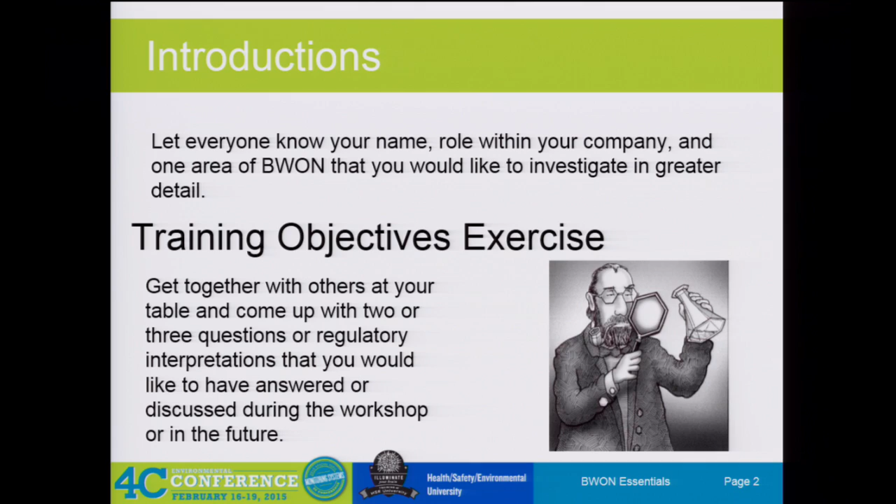Okay, great. So it sounds like we are mostly new, except for one experienced guy over here who's going to correct us if we make any mistakes. You guys don't have any specific questions on your mind? What's scary about BWON? Well, just one question. This is a full day training? Yes. I saw the 8 to 12 on the board coming in, and I think that's just the morning. We break around 12 for lunch. Okay, very good. So we will give you lots of breaks, but I also do not mind if you need to get up and use the restroom. There's water in the back of the room. Hopefully this is a good class for you guys, lots of newbies, so hopefully you have lots of good questions. And we will get started. I'm going to hand it off to Ryan.

And you get to use the mic. Yeah. Sounds good. We don't normally use mics, so this is very strange to me. This is all new to us. I also didn't know that the class was recorded. Everybody hear me? Loud and clear.

All right, so on our agenda right now is rules, history, and background, as well as definitions, applicability, compliance options, control, treatment requirements, and then at the end, a question-and-answer open forum. So we can kind of discuss things that come up. Please just stop us if you guys have questions. Yeah, feel free to stop us.

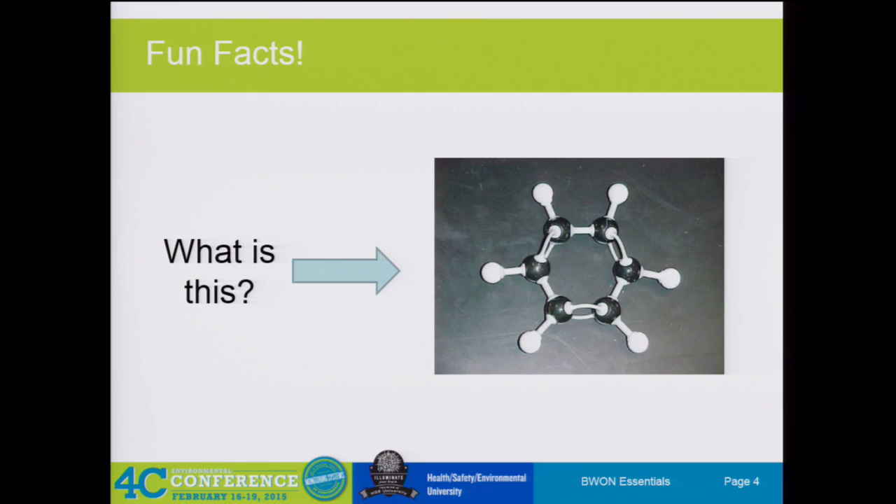Do I need it? Move it down my tie. Then keep this in the back. Let's keep this in the back. I don't either. I just don't want to leave this. All right. So, is that better? All right. So, let's just move on.

So the interesting thing about him was, I'm gonna have to actually read this off. There's this whole background about him, and I know how interesting he is, but it was said in an account that he dozed off in a chemistry lab, and in his dream, the black balls of carbon turned into black imps with forked tails that began racing around the room and would soon be upsetting the apparatus of the laboratory. He said that he was ready to run the rascals out, then almost suddenly the confusion died away as each imp grabbed the tail of the one ahead of him, the 6 imps thereby forming a whirling circle.

One hand of each imp held a tail, the other a white handkerchief, and they waved to him as the group rolled by. So at this point, he woke up with a start, realizing that the imps were acting out the formula for benzene. So then he started sketching it out. So it was all in his dream that these things were grabbing each other, and then he goes, oh wait, it's benzene. So obviously, the insanity of BWON started a long time ago, not just 25 years ago, when the first version of the rule was promulgated.

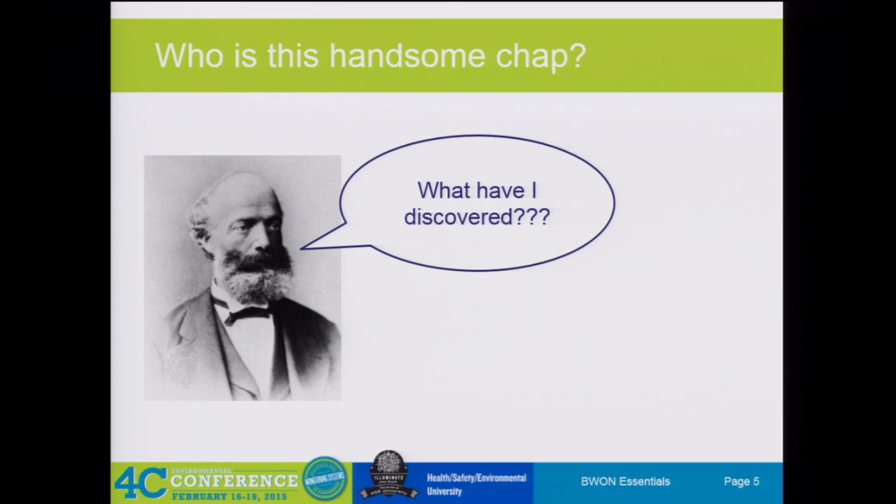Is that supposed to be in that section? Yeah, I was gonna say.

All right, so BWON at a high level overall. It's a unique rule that's a cross between an air rule and a waste/wastewater rule, and it's intended to basically reduce the benzene air emissions from waste and wastewater. Common acronyms are BWON, which is Benzene Waste Operations NESHAP, BQ, which is benzene quantity, TAB, which is total annual benzene quantity, NESHAP, which is National Emission Standards for Hazardous Air Pollutants, POG, which is point of generation, and WMU, which is a waste management unit.

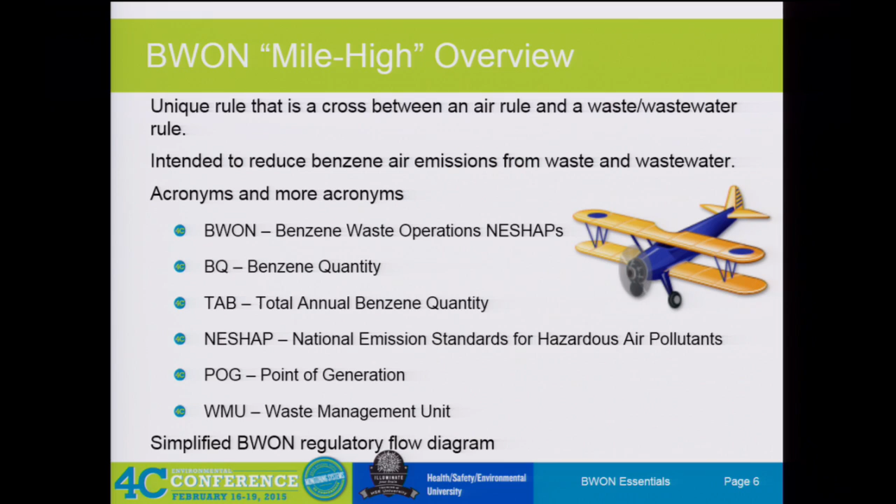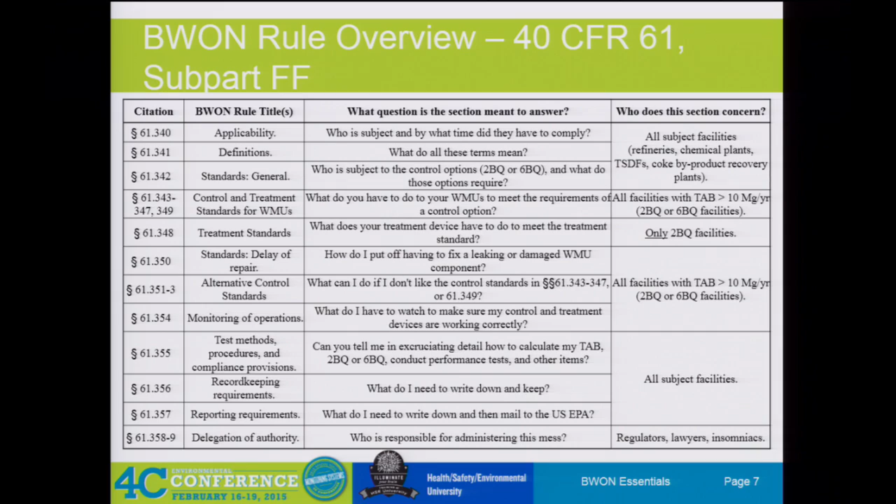So, let's see. Overall, the rule has different sections: applicability, definitions, general standards, control treatments, standards for WMUs, treatment standards. You guys have kind of gone through the rule, or at least read the rule, I'm assuming, right? You've all at least grazed past the rule. I don't need to go through this too much.

So, a refresher of BWON applicability. Whose facility has the largest TAB? And whose has the lowest? Does anyone know what their TAB numbers are, or who wants to claim they have the largest? 2 BQ. Okay. 15 for the TAB. Does anyone else have one? 7, 8. I know at chemical plants, it can be. So right now, I think Ken's got the largest one, 15, right? As a refiner.

So who's got the lowest, I guess? Is 7 the lowest I heard? Or does someone not even have to report? Has everyone triggered BWON in this room? Okay. So, Ken, what are your largest BWON waste streams? It bounces back and forth from the desalter going to the wastewater plant, and then the coker. The coker also funnels back to the main wastewater. Okay, so the coker and the desalter.

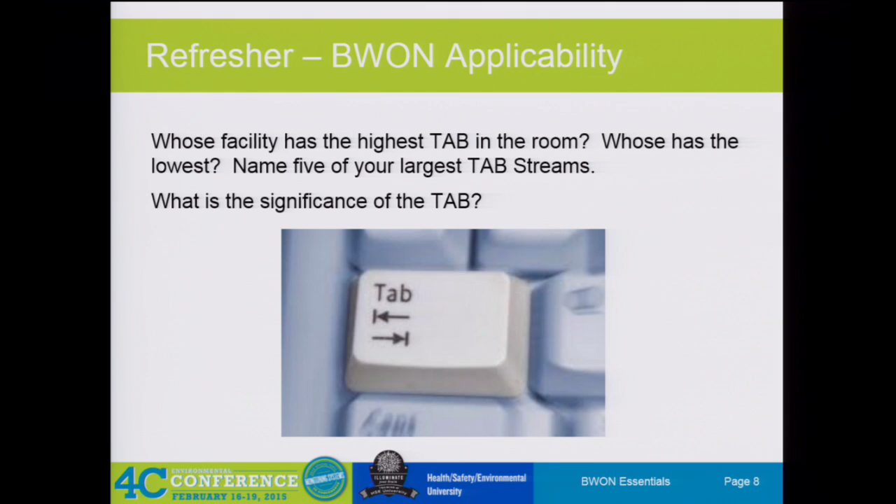So, let's go through BWON applicability. If your TAB is larger than 10, which is mostly refineries, you'll have to report the TAB and be under 2 BQ or 6 BQ, as you were saying, 2 BQ. If it's between 1 and 10, you'll just have to report the TAB, so no controls have to be implemented until you go past 10. And if it's under 1, then basically there's no reporting. You can keep a report just as a safety precaution in case you trigger, but for the most part, there's no need to have one.

BWON applicability determination. Control and treatment standards are potentially applicable to refineries, chemical plants, RCRA treatment, storage, and disposal facilities or TSDFs, and coke byproduct recovery plants. The control and treatment standards are based on the TAB, and the TAB is the total annual mass of benzene contained in waste determined at a point of generation.

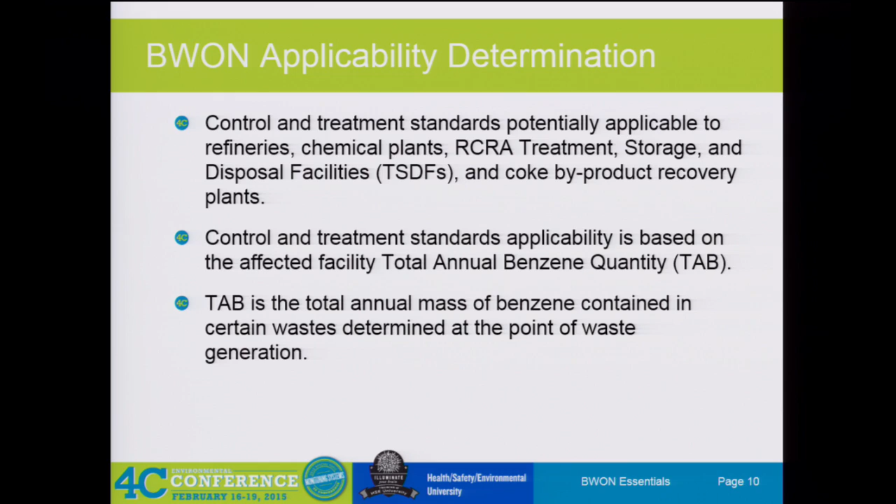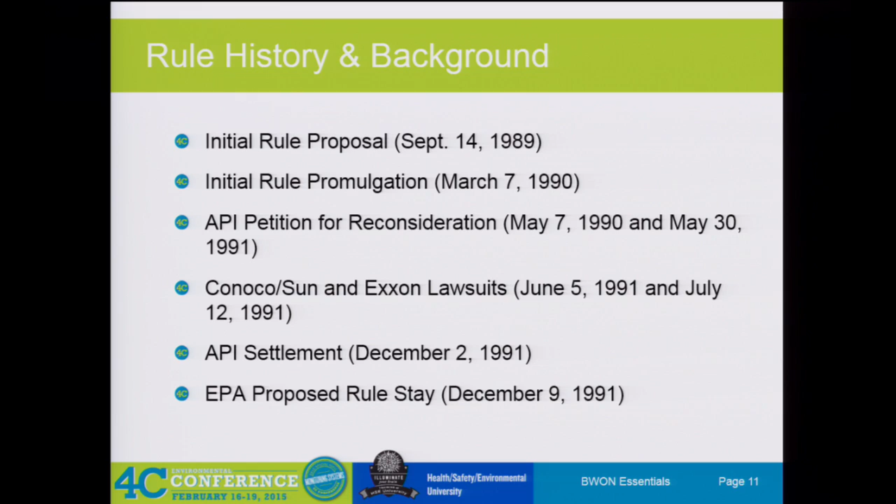So let's go through the rule's background. On September 14, 1989, the rule was initially proposed, and the initial rule was promulgated in 1990. In 1991, there was a reconsideration, and then a lawsuit in 1991 with Conoco, Sun, Exxon, and API, a settlement in 91, and EPA proposed the rule stay on December 9th, 1991. The rule was stayed and amendments were proposed on March 5th, 1992. The rule amendment was promulgated and the stay lifted January 7th, 1993.

But then the EPA had a benzene NESHAP FAQ handbook in September of '97. The first petroleum refinery consent decree was from Koch Industries, which was December 22nd, 2000. And then the draft rule clarifications was in 2007. And there could be some future rule amendments and clarifications that are coming up.

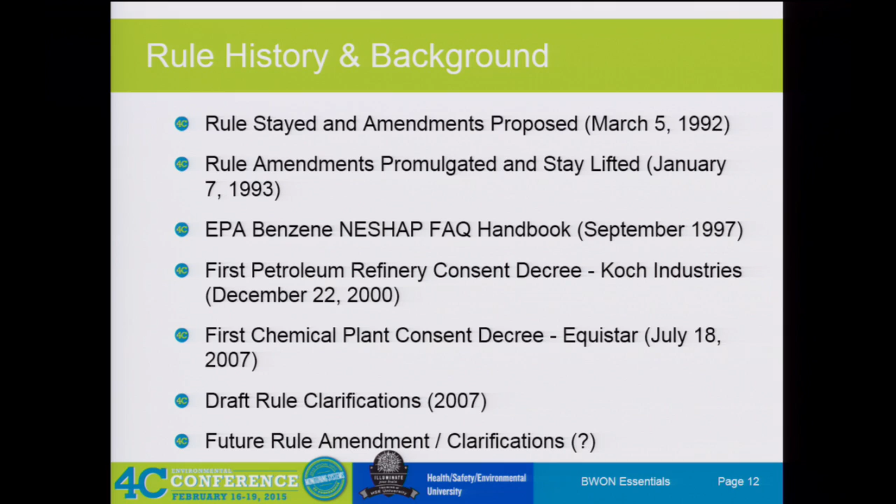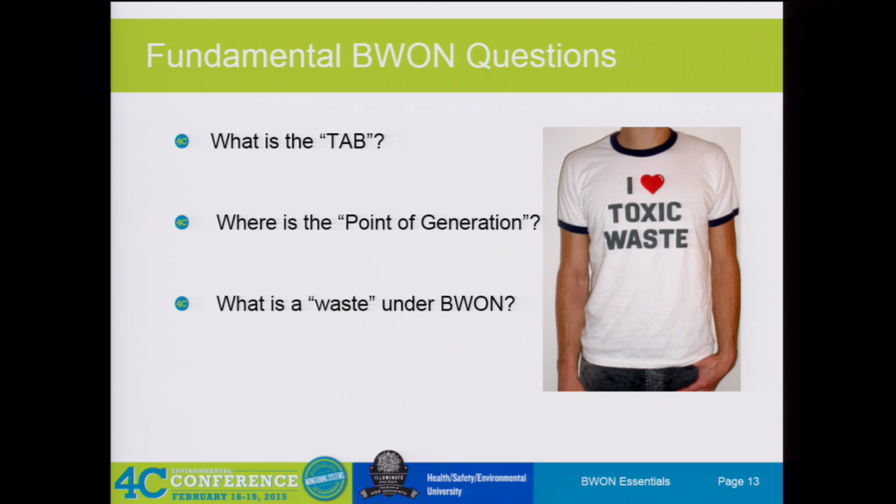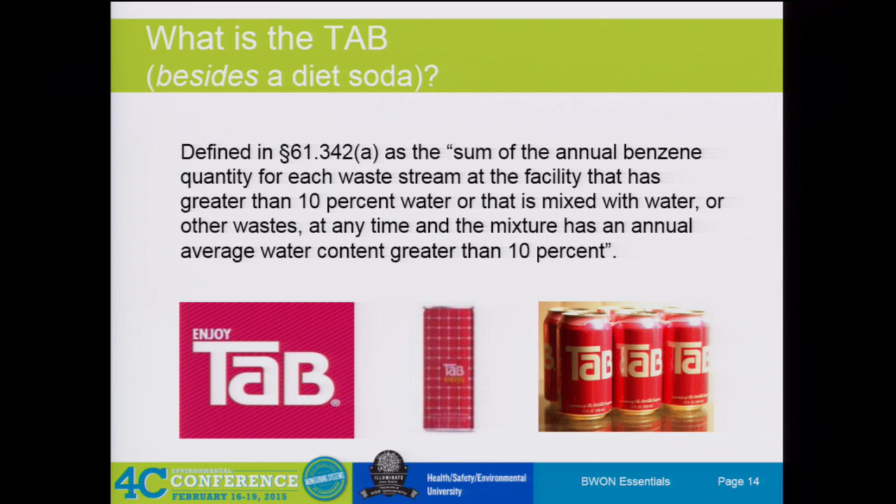So, fundamental questions of BWON. What is the TAB? What is a point of generation? And what is waste under BWON? So in the next slides, we'll kind of walk through these fundamental questions. So what is a TAB? It's not the diet soda, but defined under 61.342, it's the sum of the annual benzene quantities to each waste stream at the facility that has greater than 10% of water, or that is mixed in with water or other waste when it eventually mixes in downstream.

Where is the point of waste generation? So the location is where the TAB determination must be made. It's where it exits a process vessel that is integral to process, and then prior to a treatment process that is not integral to a production process. And so the location is prior to handling and treatment of waste. So it's leaving a process vessel before treatment. So let's say a storage vessel, for instance, or a stripper. So when it goes to a storage tank, so it's leaving like the water going to a storage tank, a surge tank, for instance. And so here's kind of a picture.

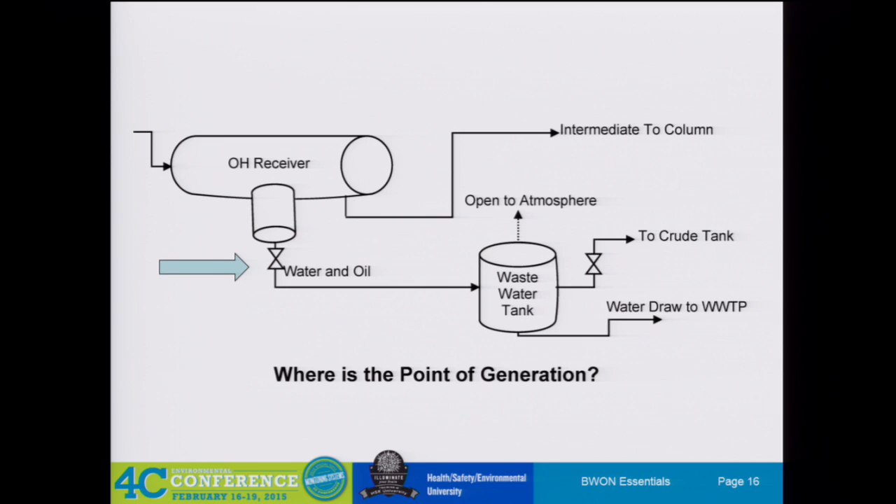So can you figure out where the point of generation would be? What do you guys think? So right here? Right here? Okay, so this one going into the wastewater tank. So that is correct. Does that make sense, everybody? Yeah. We could give some more. Yeah, we'll do some breakouts.

So what is waste under BWON? Waste is defined under 61.341 as a material that is discarded or is being accumulated, stored, or physically, chemically, or biologically treated prior to being discarded, recycled, or discharged. BWON's definition of waste is different than under RCRA. For example, recycled material can still be considered waste at their POG under BWON. So it would still need to be reported under your waste shipped off-site.

Wastes are considered to be recycled once they are fed to a process as a feedstock or are fed to a process feed tank. Prior to and during recycle, wastes are regulated by BWON. After recycle, wastes are no longer regulated by BWON. So remember that waste in forms of gas or vapor and fuel gas systems aren't regulated by BWON. It's just mainly water or solids.

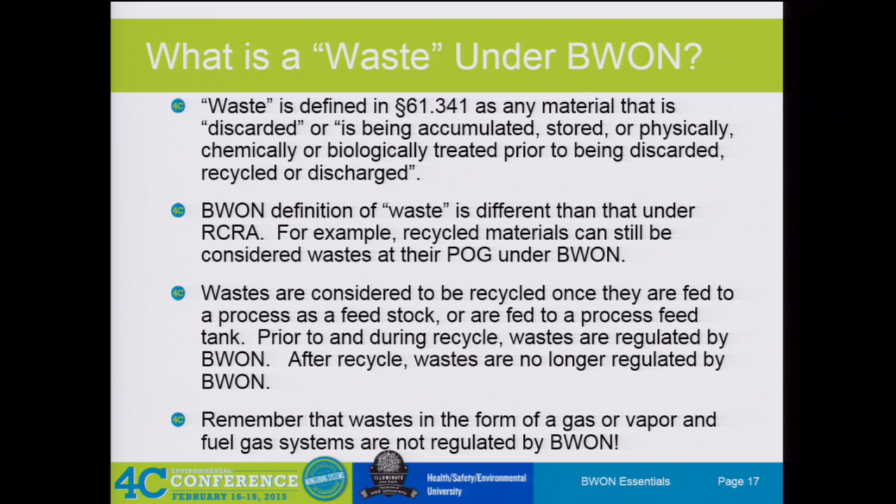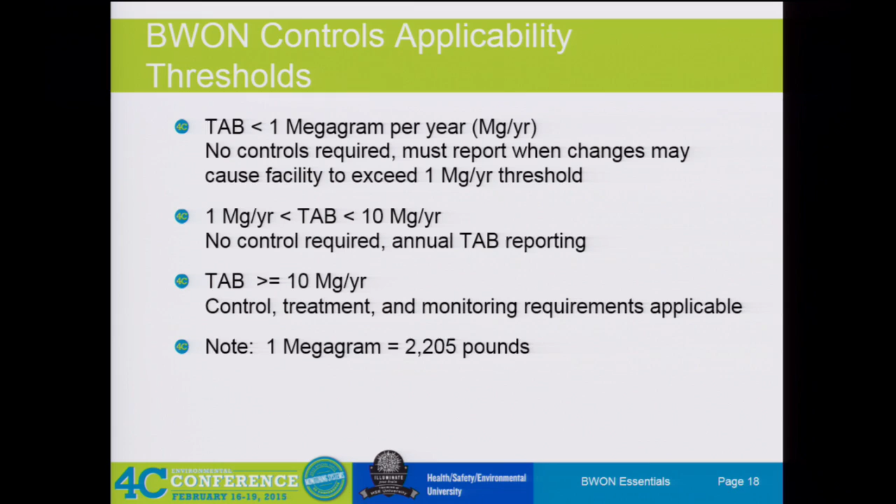And so BWON control applicability thresholds. If your TAB is under 1 megagram, there's no controls required. Basically, you must report when changes cause the facility to exceed 1 megagram. And if you're in between 1 megagram to 10 megagrams, there's no controls required, but you'll have to report an annual TAB. And if it's greater than 10, then that's when your control, treatment, and monitoring requirements will be applicable. So noting that 1 megagram is equal to 2,205 pounds.

So determining benzene concentrations. So some of you said that you've done some sampling, Lauren. So sampling is per 40 CFR 61.355(c)(3). Basically, there need to be 3 representative samples with minimal exposure to atmosphere. So once that gets sampled, you just need to cap that, make sure there are no bubbles and such. And it could be 3 as in once per month, or it could be once per quarter of 3 samples.

So the samples also need to be chilled to less than 10 degrees Celsius or 50 degrees Fahrenheit with a sample coil. And it needs to be analyzed per methods 8020, 8021, 8240, 8260, 602, or 624. The compliance samples must follow the standard and EBU inlet samplings treatment demonstrations.

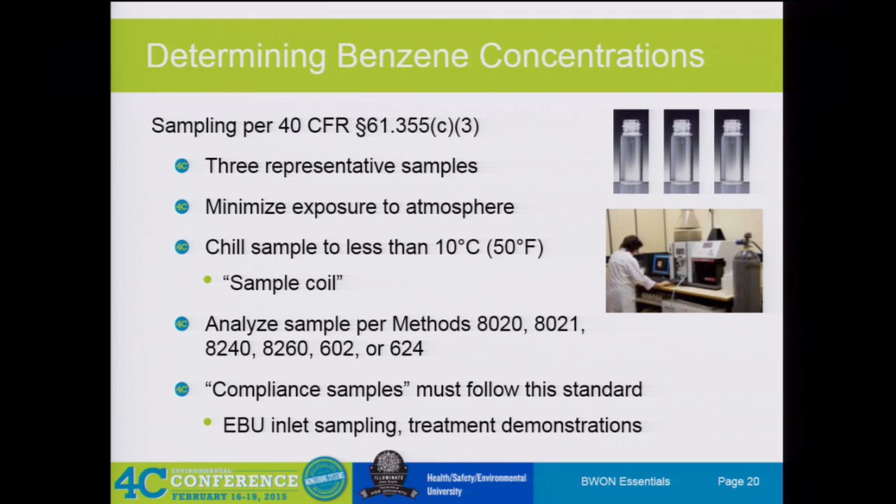Yeah. You could, but just in case there are spikes. Emily, do you agree?

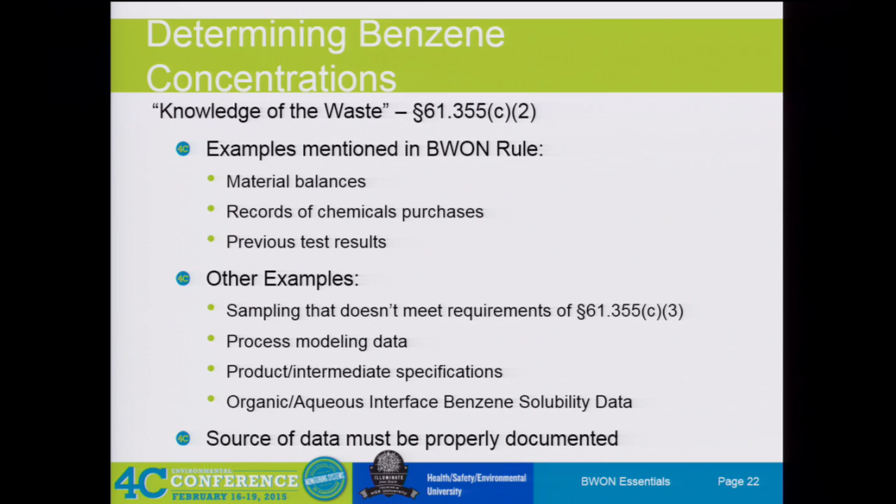So determining the benzene concentrations. So kind of using the knowledge of waste. Some examples the rule mentions are material balance, records of chemical purchases, and previous testing results. And then some other examples would be sampling that doesn't really meet the requirements of 61.355, some process modeling data, product intermediate specifications. So you can find that through your labs, since they do samplings themselves, and then organic aqueous interface, benzene solubility data, and source of data must be properly documented. So all those chain of custodies and lab results must be kept in hand.

So concentration rule of thumb. If the oil phase is known, but the aqueous phase isn't known, typically a rule of thumb would be the aqueous phase is equal to the oil phase divided by 100. And the basis for this rule is based on the effective benzene solubility, and it's generally a conservative estimate of aqueous phase benzene concentration. So it's not a conservative estimate of the oil phase benzene if the calculation is reversed.

So another way, if you knew your aqueous and you didn't know your oil, would be taking the oil phase. The oil phase would basically be 120 times your aqueous phase. So aqueous benzenes aren't normally greater than 1400 to 1600 ppm. That's kind of a rule of thumb that you can use.

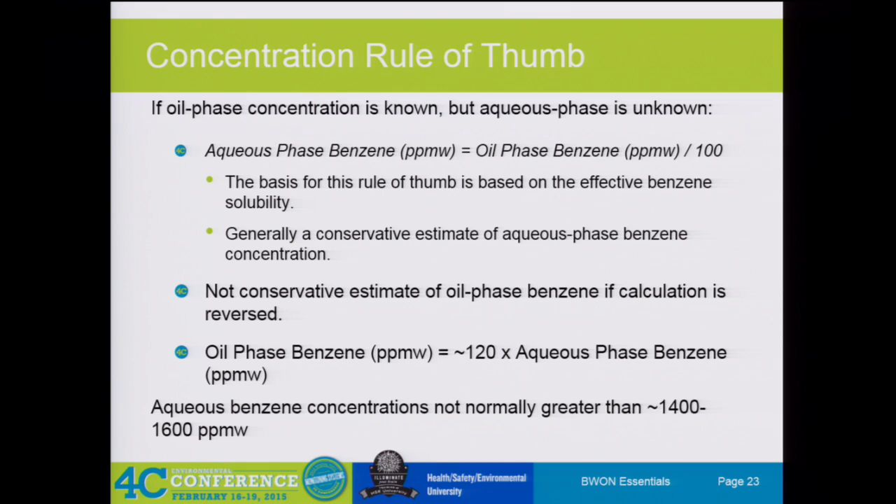Determining TAB waste. So the highest annual quantity of waste generated from the past 5 years of historical records, the maximum design capacity of the waste management unit, measurements that are representative of maximum waste generation rates. The measurement is not defined in BWON, so in practice it includes traditional forms of measurement like the bucket test, time to fill a waste management unit of a known size.

So it's literally the time it takes to fill a 5-gallon pail. Yeah. You sit there, maybe you have a tap on, and you're saying, okay, that's going to be my flow rate. So that's what we mean by the bucket test. It's a very simple way of documenting that.

Okay, so some exceptions for TAB accounting would be remediation waste isn't required to be in the TAB calculations. It does need to be included in your 6BQ, but not in your TAB, or 2BQ. Waste generated by turnaround activities may be averaged over the turnaround cycle for the TAB determination. So you could average it within the 5 years, or you could just take it with each year if you'd like, but that could cause a spike in certain years. Let's say you had a big turnaround, so you can average it over the 5 years.

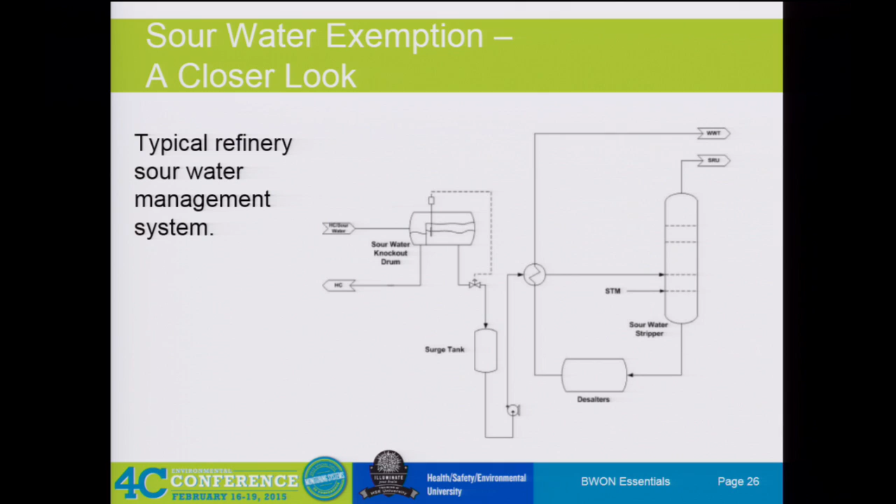So we'll go ahead and have a breakout session. Everybody's got a calculator, we're going to have you do some TAB calculations. In the back of your book there's a section for your breakout. I know you guys don't have your Excel to plug and chug everything in, so we'll have to do it by hand.

So what we're doing in this breakout is we're trying to calculate the TAB quantity. We're giving you some information: we've got a desalter stream, a tank water draw, and a recovery waste.

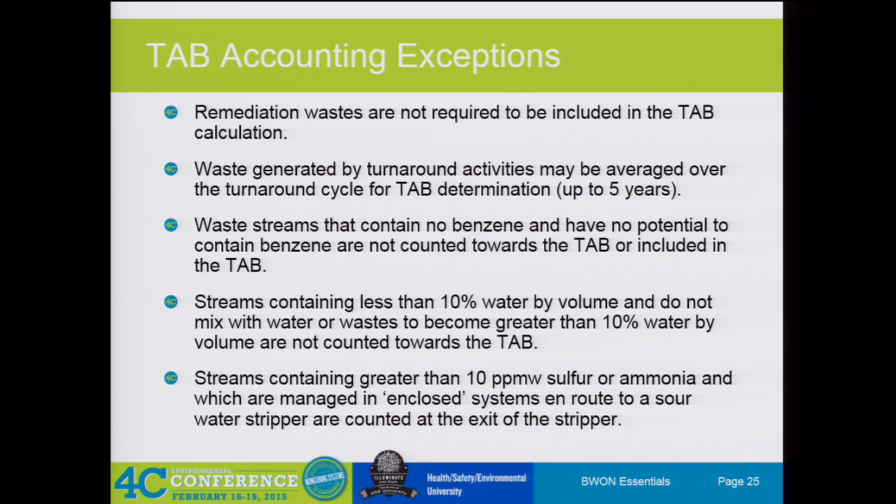So this is your TAB calculation, remember guys? It's your quantity times your concentration, okay, and then you have to add them all up. And you have to include both the oil and the aqueous phases.

Were we mean to you on this one? Oh no, I guess we weren't too mean. Watch the units, because that's what catches most people - you have to do some unit conversion. Divide by.

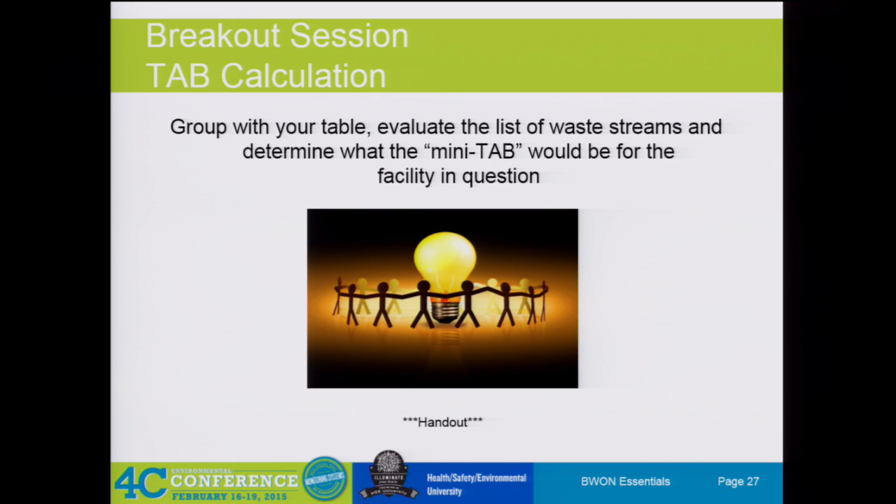Anybody got an answer? Still working?

Yep. So all you do is, for the turnaround waste, guys, what we're trying to get at is that you can average your 15 megagrams over a 5-year period, so divide by 5, and add it to your total.

I got roughly 5, 4.9. Yep. We will give you the answer. You divide by what?

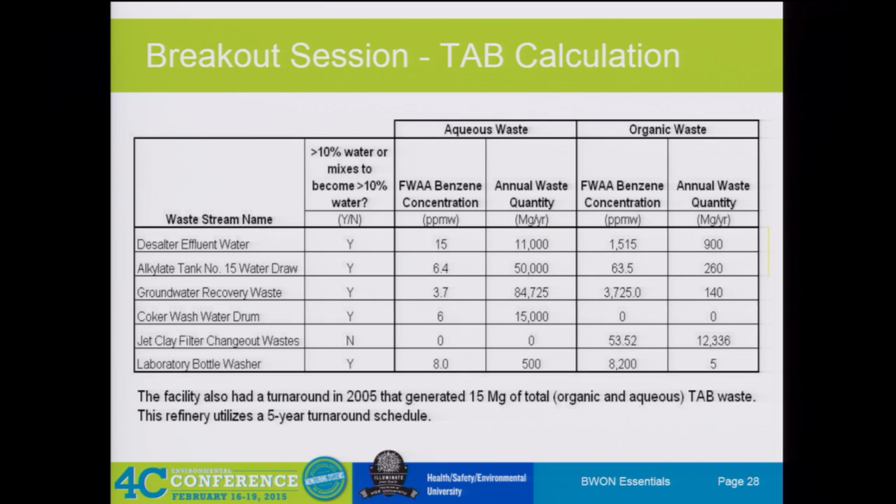Is this thing on? Okay.

For your quarterly reports and from your consent decree standpoint, you've got all kinds of different reports, right? So you've got your end-of-line samples that have to go in there. Yeah, you've got your 6BQ or 2BQ that you're doing in there. And that is where the remediation waste kind of circles back around.

Okay. Here's where your compliance options are starting to come in. So first thing you do when you have a benzene program is you calculate the TAB. If you're over what number? 10. You start triggering these, right? So here are your different compliance options. Anybody use a 1 megagram compliance option?

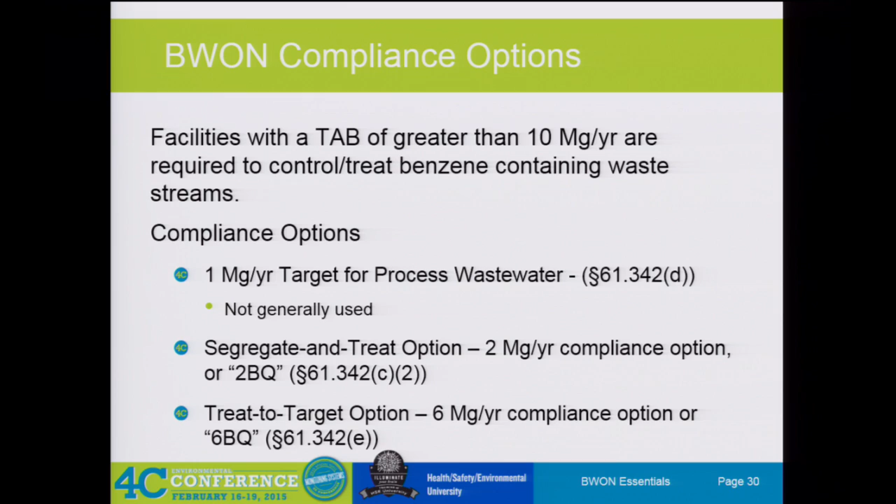So 2BQ compliance options: this is a control of non-exempt waste streams until treated or recycled. You calculate these waste streams at your point of generation. That's important — we're going to go through an exercise where I'm going to make you review what you're looking at here. So you may select waste streams to exempt from control and treat, as long as the benzene quantity from those waste streams at the point of generation sums to less than 2 megagrams. So that's what this really is. That's your limit — your 2BQ, your 2 megagrams per year.

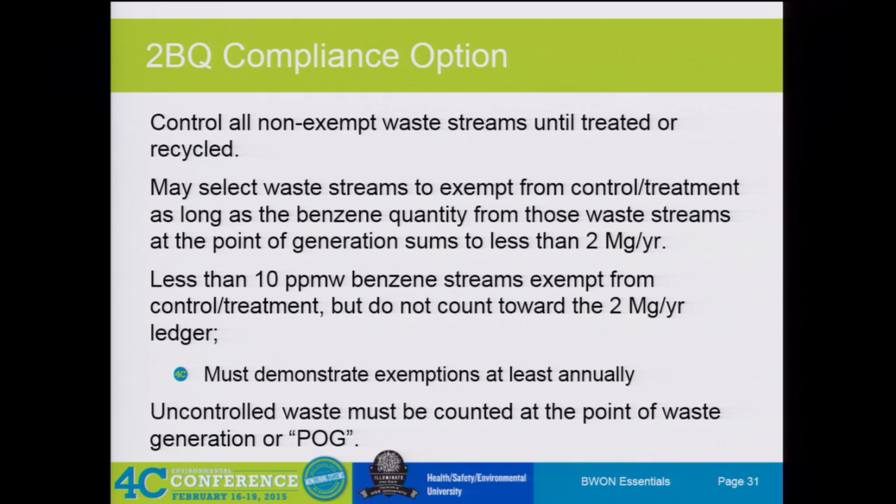And then you have to do these exemptions — you must demonstrate them at least annually. So most of the time, you're going to do the 10 ppm sampling. You're going to use those lovely VOA vials, and you're going to use your sample coil, and you're going to test for this 10 ppm, and you have to do it at least annually. Make sense? 2BQ is a little more confusing than 6BQ, so most of you are 6, so.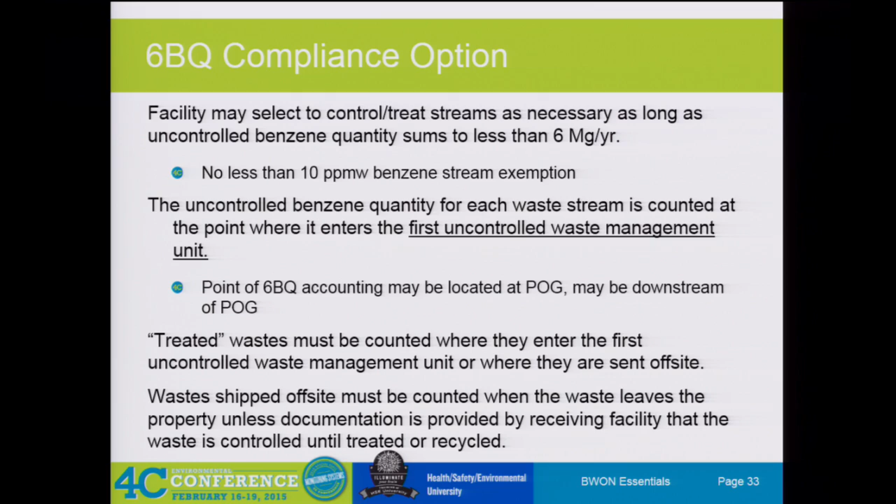I think I covered that one. Organic waste streams must be controlled until treated or recycled in accordance with that citation up there—that is a 6BQ reg. I'm not going to regurgitate all of that stuff.

The classic treatment standards and demonstrations do not apply to treatment at 6BQ facilities. So what this means is when you're actually having a treatment, the only time you get credit for it under BWON is if you're using the 2BQ compliance option. 6BQ, you do not get credit for treating your waste. It's all about your quantity.

Benzene quantity under the 6BQ option is considered a running total during the reporting year, and compliance cannot be reestablished. So once you're 6BQ, you're 6BQ. They don't want you switching around to the different compliance options.

EPA's—I kind of mentioned this already—this is EPA's favorite compliance option. It's easier to evaluate, and there's no less than 10 ppm exemption. Questions? Can you go from 2BQ to 6BQ? Yes, you can, but you can only do it once.

Other questions? Okay. Sure, in 6BQ, that's it. Well, that's it, even if you can demonstrate you're falling below that. Yep. Absolutely. Once you're above that 10 megagrams per year, you've triggered BWON, and then once you've picked your compliance option, you have to stick with it, with the 6BQ.

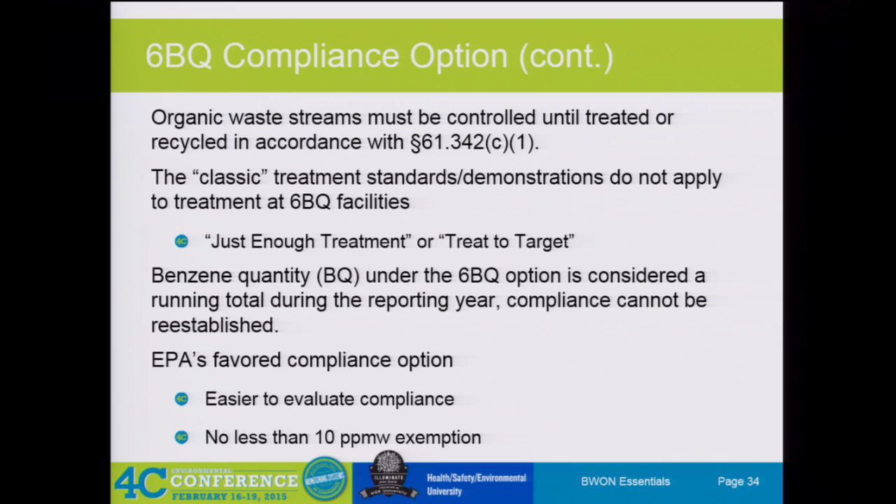All right, 2BQ versus 6BQ, the bucket metaphor. Here's our lovely bucket again, right? So 2BQ gets 2 buckets. 1 bucket for all uncontrolled waste greater than 10 ppm, 2 megagrams per year, and then they get 1 bucket for uncontrolled less than 10 ppm that could be of infinite size. So if you are less than 10 ppm, you can have a million streams out there and not hit your 2 megagrams. They don't count. It's less than 10.

But what do you have to do on an annual basis? Sample. Yep, you got to prove it. 6BQ, you get 1 bucket. And that goes for all of your uncontrolled waste regardless of your concentration, right? So there's no de minimis quantity of benzene under BWON for 6BQ. Okay?

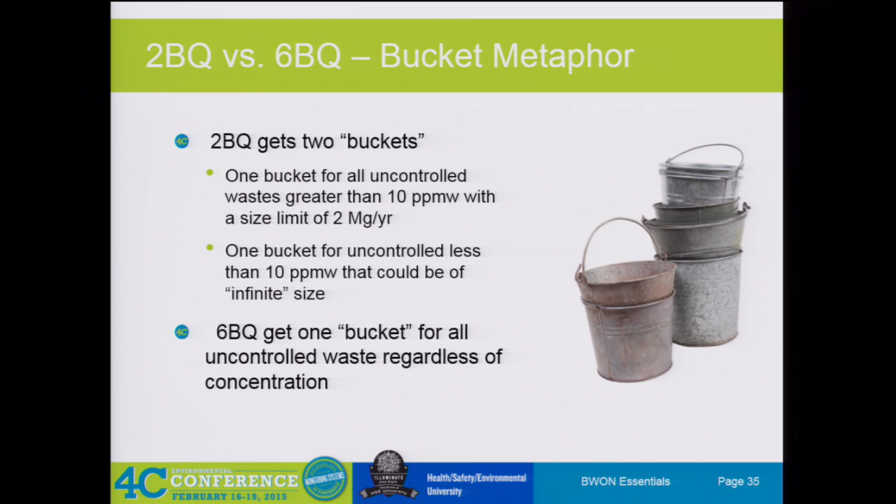What's important to remember on the 6BQ is if you have organic waste with less than 10% water, you what? Have to control it. You don't get an option. So aqueous, you do. You have that option to either control it or leave it uncontrolled, and then it counts towards your 6BQ. Questions? Okay. All right. We're going to do an exercise.

Here is where I need my markers. So again, we're flipping back to the back of your book. I think I'll use blue. I need a drawing so I know what I'm drawing. Okay, let's see. So you should have about 5 different sheets in the back of your book that look like this with a bunch of tanks on it and letters and all that good stuff. Oh, I'm going to just turn this off.

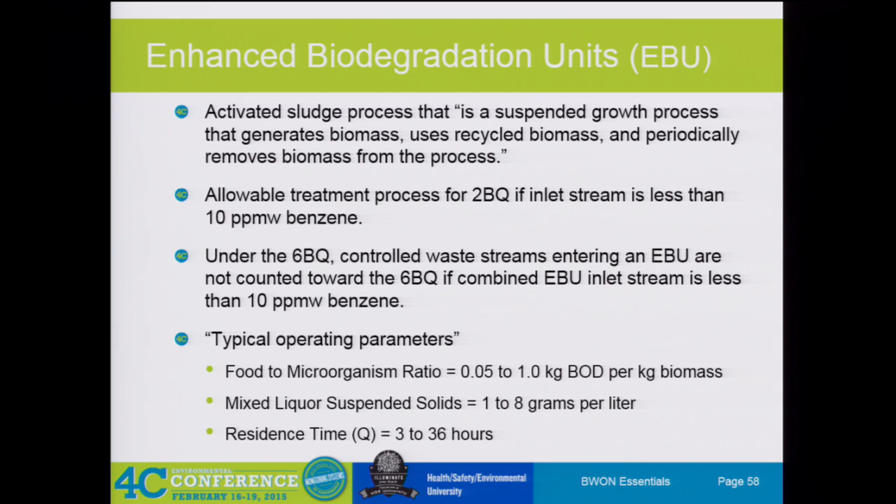Yes? Microorganisms are eating the benzene and something else, and that's why. Yes, correct, correct. But you still have to measure it, right? Your EBUs. The inlet, yes, you do. Okay, we're going to go back to our lovely schematic, and I'm going to change things on you. And I'm going to turn the mic off because it does not like to be next to the speaker.

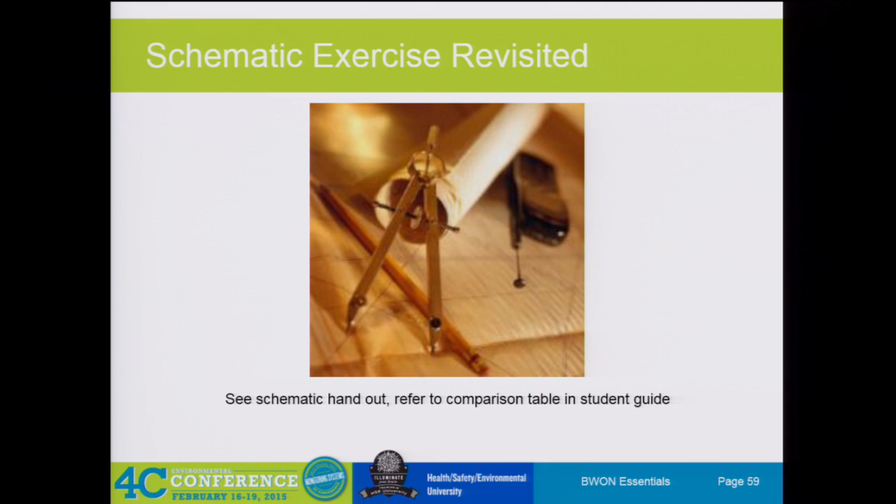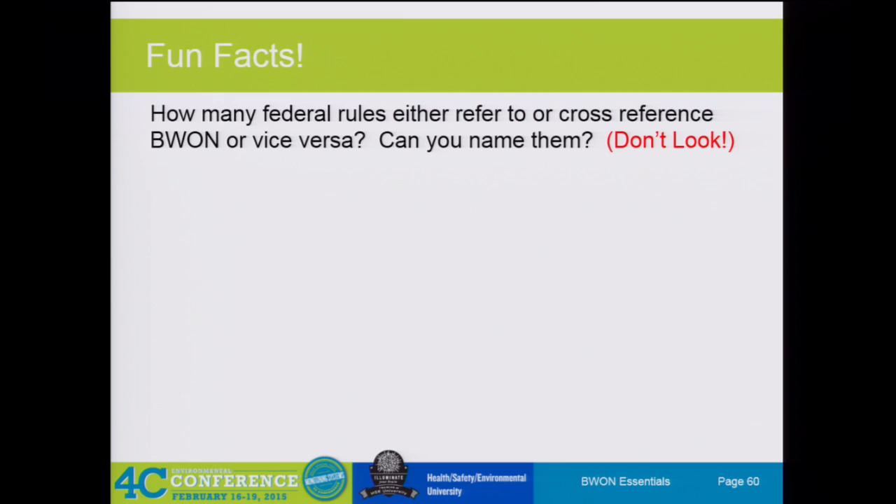Okay. All right, don't look at your books. Fun facts. How many federal rules either refer to or cross-reference BWON or vice versa? Can you name them? We talked about a few of them. QQQ. Well, Method 21 is what regulation? LDAR. Kb. RCRA. GGG. Yep, flares. What else we got?

There's a lot. HON, ethylene MACT. I mean, you've got MACT CC, MACT DD, QQQ. You guys got a lot of them. But we haven't gone over all of them, right? No, and we're not going to. No, no, no. I am not going to talk about every one of these.

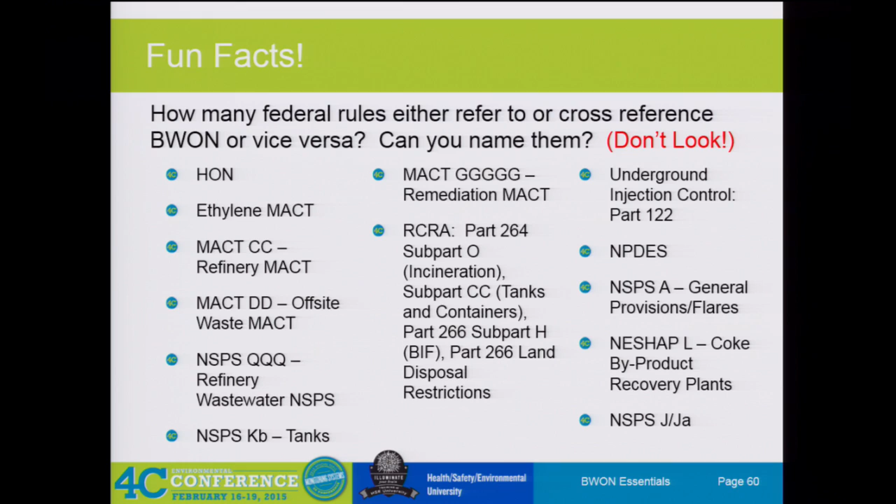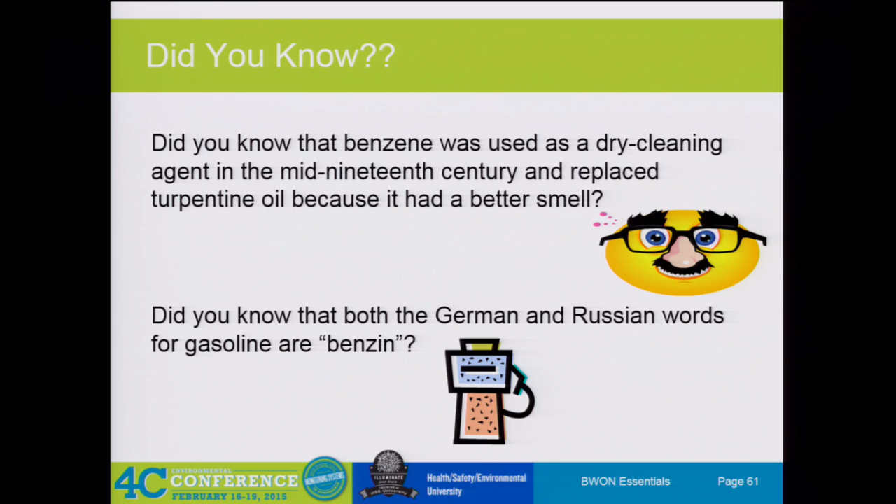All right, here's some more did you knows. Did you know that benzene was used as a dry cleaning agent in the mid-19th century and replaced turpentine oil because it had a better smell? Did you know that both the German and Russian words for gasoline was benzin? It's kind of funny when you think about our history and how far we've come with benzene and why they started caring about it, right? So it's a pretty serious rule.

So we're clipping along. So we're going to go into round 2 because I think you would rather get out earlier this afternoon. And we're going to play some Jeopardy. So there's some fun this afternoon. But I'm going to let Brian take over and cover some record keeping right before lunch. We'll get it done before lunch because it's the really boring part. Nobody likes record keeping. And then we'll end the day with all of this good stuff over here. Yes. I made Brian do all the non-fun stuff. Oh, yeah. Okay. Right.

All right, so we can start talking about record keeping. So part 2 is going to be record keeping, reporting. Let's see. Record keeping, reporting, waste stream documentation, commonly missed waste streams, BWON provisions of consent decrees, common problematic deficiencies, emerging BWON issues, and then final questions Q&A session.

So record keeping and reporting, why is this so important? This is how you determine compliance or demonstrate compliance. Records represent your face to inspectors, and reports are your primary way of communicating to the EPA. So consolidating all of your BWON records in one place is probably the best way to handle your records while preparing for your TAB. So TAB and uncontrolled benzene quantity waste streams records.

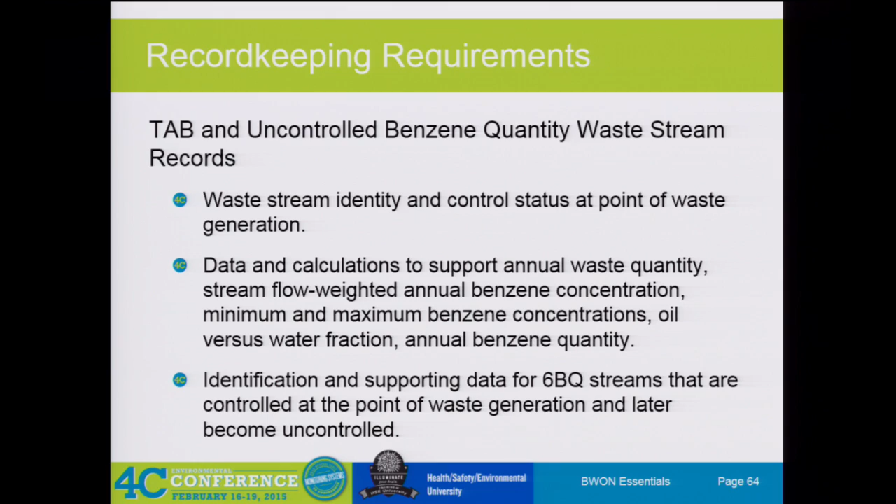For each closed vent system and control device, facilities are required to demonstrate compliance at the control device through one of the following methods: either engineering calculations or performance tests. All control devices must have a statement signed and dated by the owner or operator certifying that the closed vent system and control device is designed to operate at the documented performance level when the WMU is vented to

the control system. And if engineering calculations are being used to determine the control device performance, then the facility is required to maintain design documentation. So device-specific specifications, drawings, schematics, piping, or P&IDs.

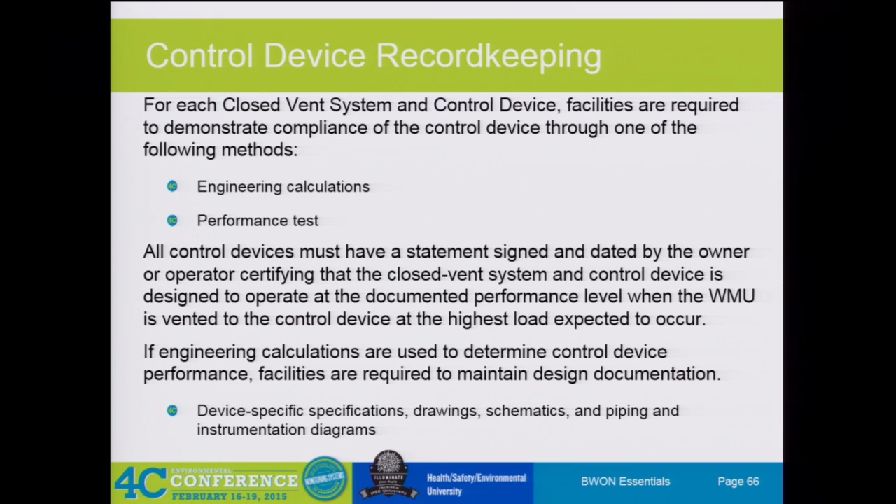Everyone have control device documentation? You mean like initial performance test, sure. Yeah, performance test, or your 20% count, or your carbon. Yeah, okay, I'm getting to that, that's a big one. That might be something to consider. You are required to have that, so if you don't have it, you have to go back and look at all your monitoring data and generate it. So that can be considered part of our... if you don't have it, yes.

Yeah, absolutely. Okay. So for carbon adsorption systems that do not regenerate the carbon bed directly on site in the control device, such as carbon canisters, you need to have the vent stream composition and constituent concentration, the flow rate, temperature, and relative humidity, the design exhaust vent stream organic compound concentration level, or the design exhaust vent stream benzene concentration level, and then the capacity of the carbon bed, the type and working capacity of activated carbon being used for the carbon beds, and then the design carbon replacement intervals. So how often you're replacing it before it breaks through.

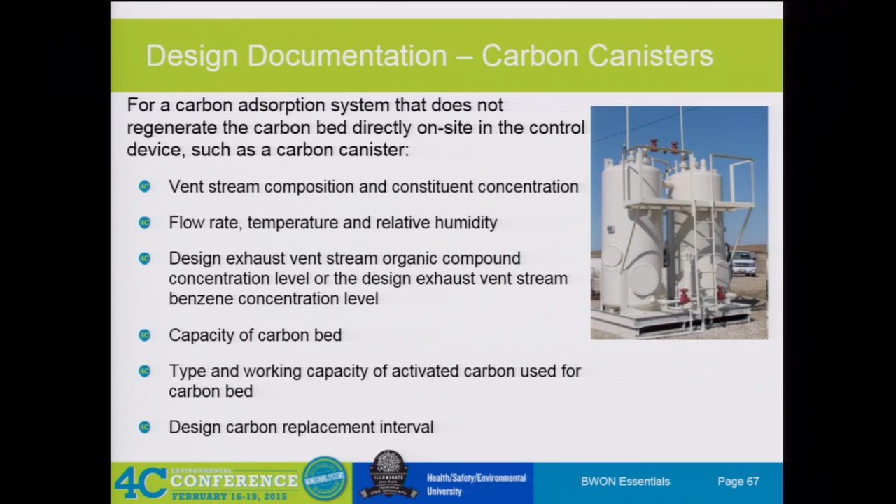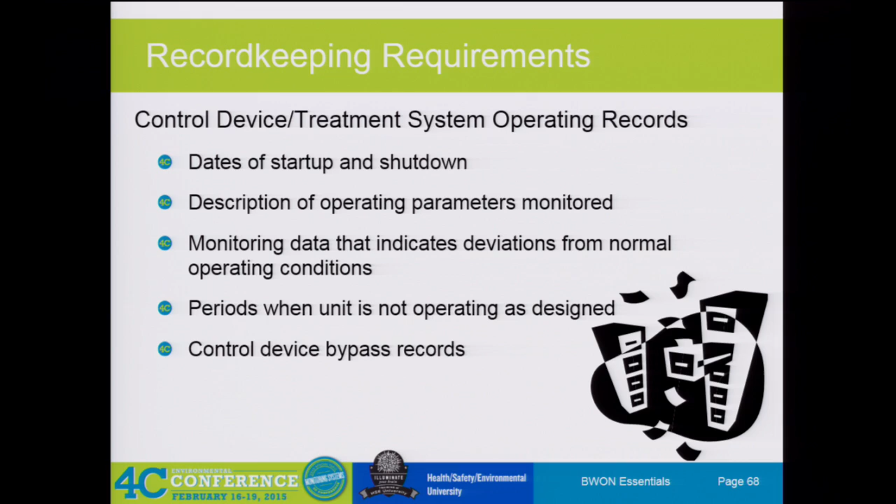Control device treatment system operating records: basically having the dates of your shutdowns and startups, descriptions of operating parameters being monitored, monitoring data that indicates deviations from normal operating conditions, periods when units are not in operation as designed, and then control device bypass records. So there's a lot of record keeping to have on hand.

So you all know that the benzene annual report, or the TAB report, is due April 7th for the previous calendar year. The TAB waste stream information and estimates are on there. The 6BQ or 2BQ uncontrolled exempt waste stream lists and benzene quantity estimates. And the report will summarize all the inspection monitoring failures and the corrective actions taken.

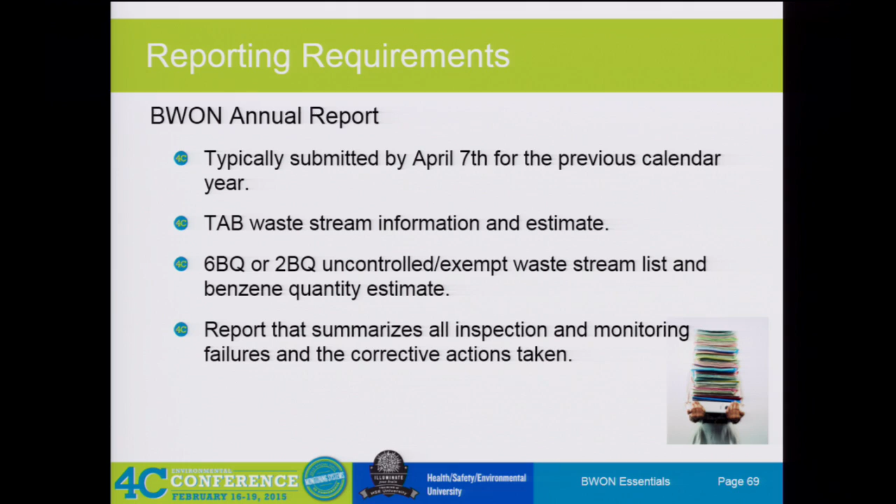The quarterly reports are submitted on a calendar quarter basis within 30 days of the end of the quarter, certifying that all inspection monitoring has been completed, and then reporting any periods where the control device or treatment device monitoring was out of the regulatory range. So flare pilot outages, EBU, inlet sampling, benzene stripper outlet sampling. It also includes reporting seal gap measurements on the floating roof oil and water separators that are out of range, and then the floating roof tank seal gap measurements based on Kb that are outside the regulatory limits. So make sure all that's included in your quarterlies.

Yeah. I think we do tank seal gap measurements on an annual basis. Okay. And yet we have to report quarterly. Report in the quarter that you've done the inspection. Okay. So you're not required to report it if you haven't done it. Because you're right, especially if you're following Kb, you have an annual inspection requirement. Basically, it's just to make sure it goes in your quarterly along with those big inspections.

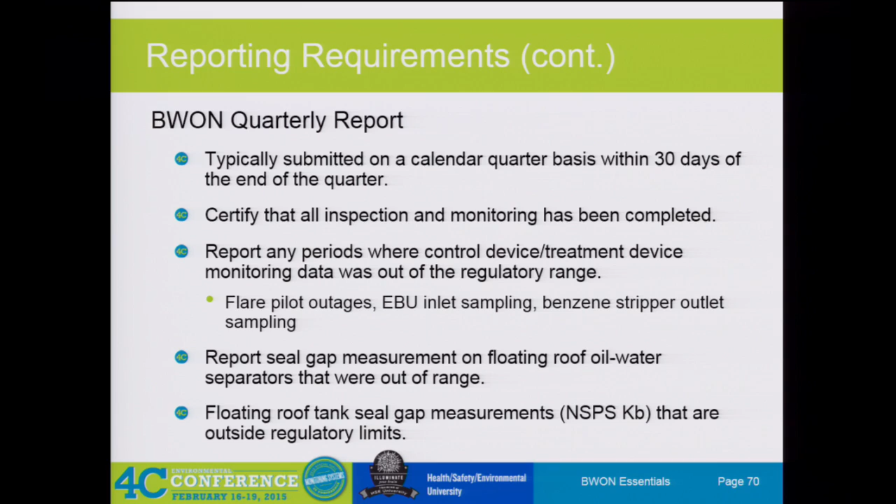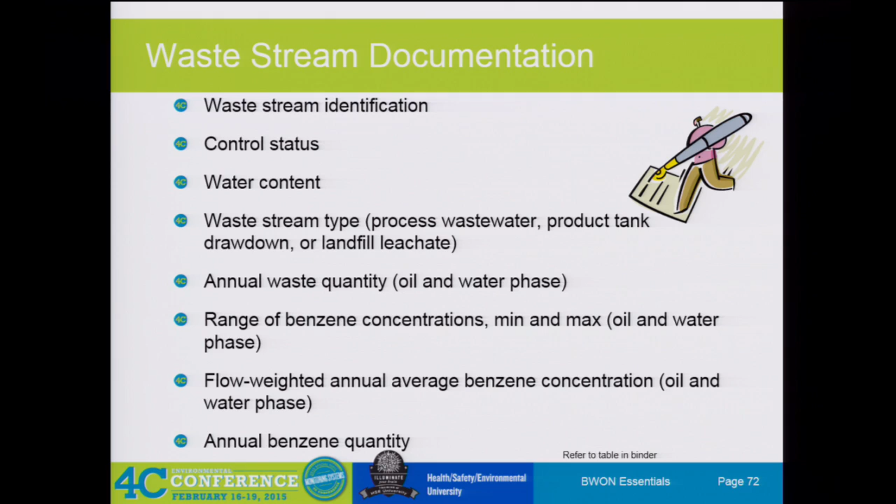So they'll include the waste stream identification, the control status, the water content, the waste stream type, so whether it's process wastewater, product tank drawdown, or landfill leachate. And the annual waste quantity, the water and oil phase, the range of the benzene concentrations, minimum and maximum of the oil and water phase, the flow-weighted average of the benzene concentration, oil and water phase, and the annual benzene quantity.

So your waste quantity is determined on the process knowledge, the design documentations, discussions with operators and engineers familiar with the waste generating frequencies and the flow measurements. So sitting down with your operators or your process engineers and asking them, hey, how often are you sending this to the waste, to oily water sewers, or how often are you sampling specific things?

Document even any evidence of waste quantities, field observations, and bucket tests. So as we mentioned, the 5-gallon bucket, you can perform that, or if you're trying to figure out the oil versus water, you can use an Erlenmeyer flask and just let it sit and settle. What else could I use? How about your rule of thumb? Make sure that you're documenting that. Most of the time, that should be right with all of your TAB documentation.

So I've seen it in one big, huge spreadsheet most of the time, where you've got it all the way across the row, all of these things Brian's describing for each stream. You have to have it for each benzene waste in that stream. So it becomes a labor-intensive operation, but it's really important because it is required to be there. So it could also be just a rule of thumb of, I talked to the operator, and he said that it's about, give or take. That's perfectly fine.

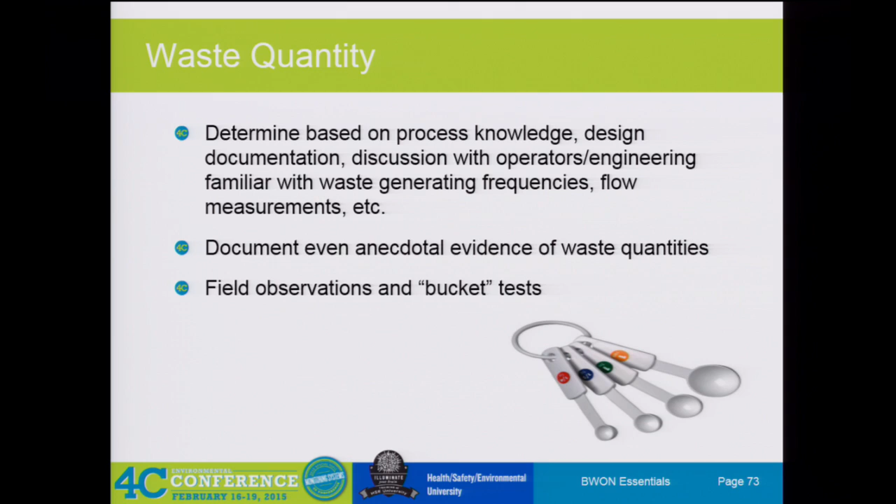For your desalters, some examples would be like an operator would say, according to the crude unit engineers, the design water wash rate is 5%, and the design unit charge is 180,000 barrels per day. Therefore, the annual waste quantity for the water phase is your unit charge rate multiplied by your percent of design water wash rate, times the conversion of gallons to barrels, times the conversion of pounds to gallons, times 365 days in a year, times the conversion of pounds to megagrams, and you get 522,000 megagrams per year.

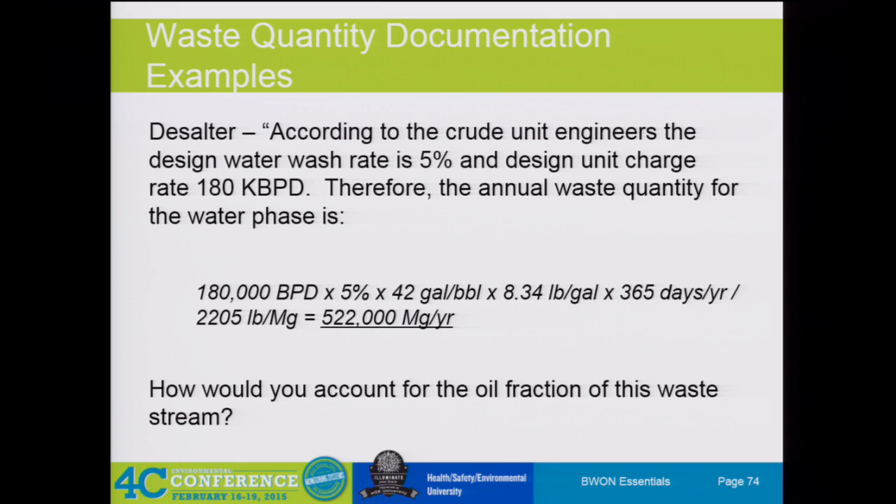So benzene concentration data: oil phase concentration data sources. So products and intermediate modeling data, or HYSYS. Everybody use process models for their BWON? I don't see this very often. Most of the time environmental people just let the tech service people play with those models. We don't use them very often, but you can use it. It's a good way to verify data. Or you could be using sampling data, MSDS, or product specifications.

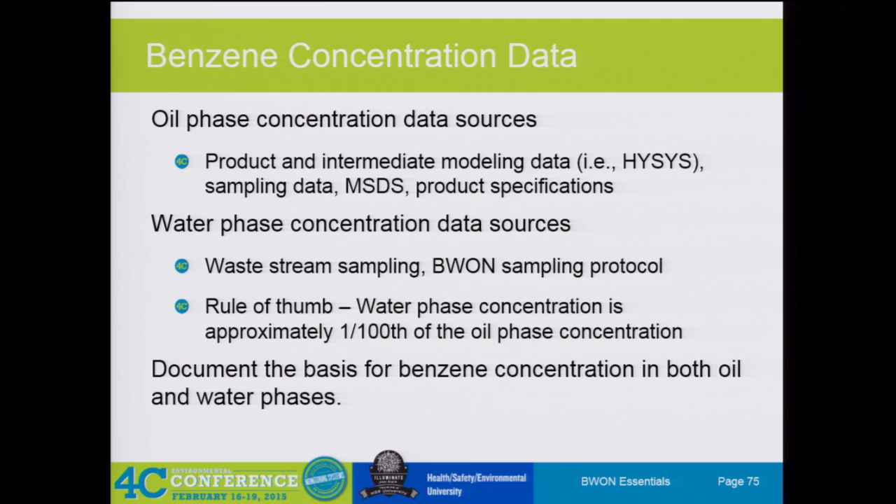Water phase concentration data sources: you can use waste stream sampling, BWON sampling, using the BWON sampling protocol. Rule of thumb is the water phase is approximately 1/100th of the oil phase concentration, and then just make sure to be documenting the basis for the benzene concentrations in both oil and water phases. So let's tie everything together. So, back to the books.

So the scenario is a tank water draw. You have a gasoline tank water draw where 5,000 gallons per month is drawn from this tank on average, with approximately a 5% oil undercarry, and the gasoline benzene concentration is 15,000 ppm, and 1 gallon of water equals 3.8 kilograms, and 1 gallon of gasoline equals 2.8 kilograms. So what we want to know is the contribution to the TAB in megagrams, the uncontrolled benzene quantity, or the 6BQ, in megagrams, as well as the 2BQ in megagrams.

So we did have calculators go around, so it's going to be one calculator per table, if you guys want to use that. And hint, hint, it's going to an open oily water sewer.